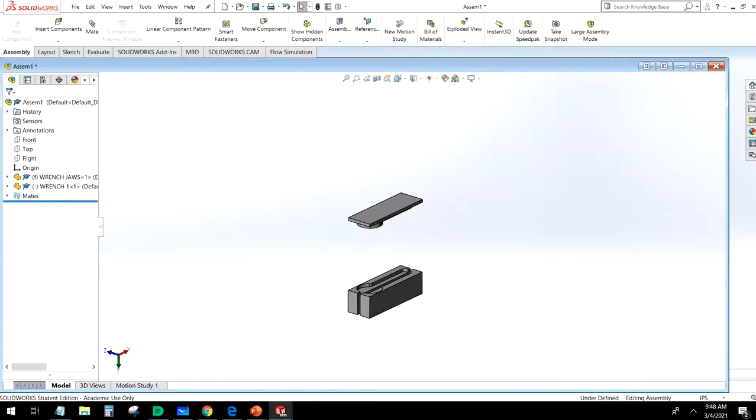So in our last few videos, we went ahead and we generated a custom tool table to match the tool crib that we have in person. We generated the tool path for our wrench, our custom CNC wrench. Now what we're going to do today is we're actually going to generate the model for our custom SoftJaws. Now, this is an easier process than I think a lot of people realize.

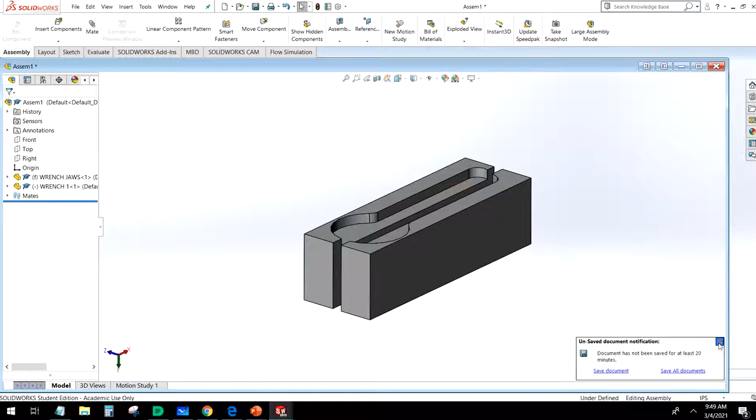And the reason why we have custom SoftJaws is because if we look at our wrench, we've got this flange of material that we use to hold this part into the vise. Well, we want to remove that. We need to take that material off. But if we try to clamp this part in just a regular mill vise, it's not going to hold it securely. We're not going to be able to clamp this very well.

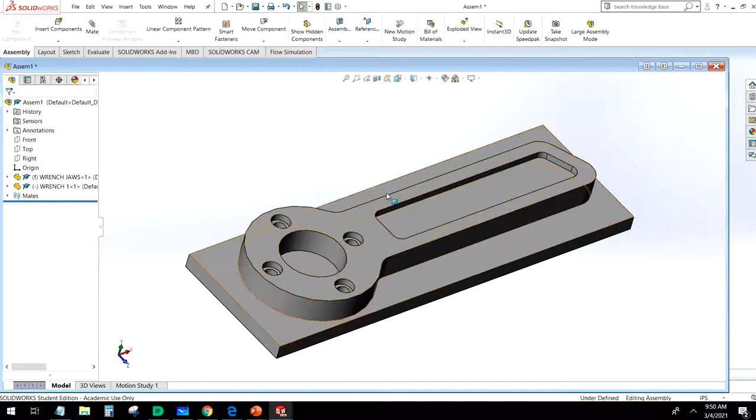So what we need to do is to create sort of an adapter, an interface between our part here and the mill vise. And SoftJaws is how we do that. So the way SoftJaws work is we're going to mount each one of these jaw plates to our bench vise. And then our piece is just going to sit down right in here like that. And it's going to clamp and hold that together securely.

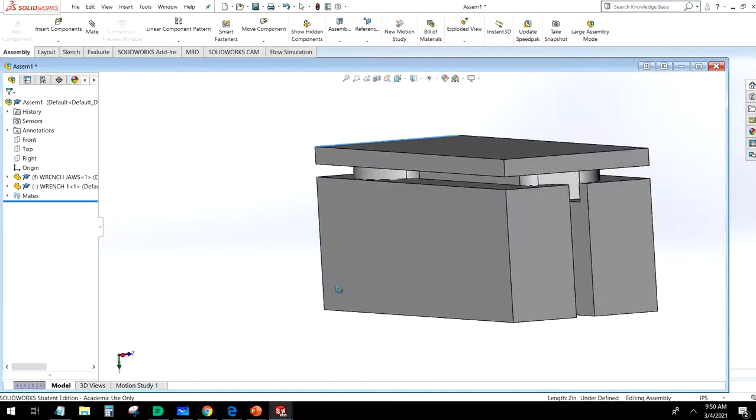And then we can come in here with the face mill and just sort of buzz this back plate off. If we wanted to, we could also do more milling on the backside if we had pockets or anything like that. But in our case, we're just going to buzz this off.

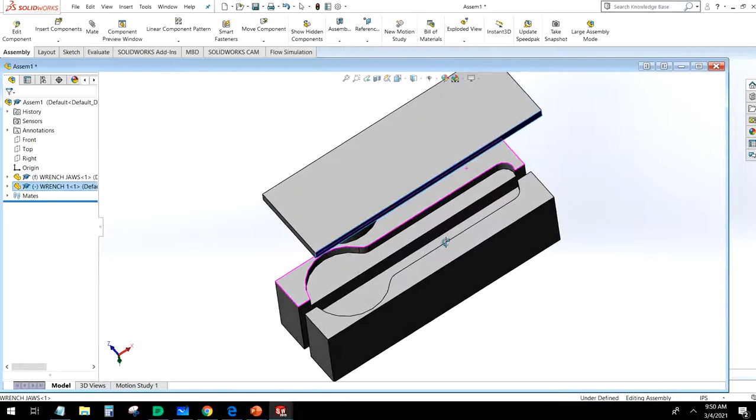Now, how do we go ahead and create these? Well, we're going to start this by opening up our wrench, this piece here from the last video. Now we're going to go ahead and save this as wrench SoftJaws, because we don't want to overwrite that file that we just made. So we're going to save this as, let's see, file, wrench SoftJaws.

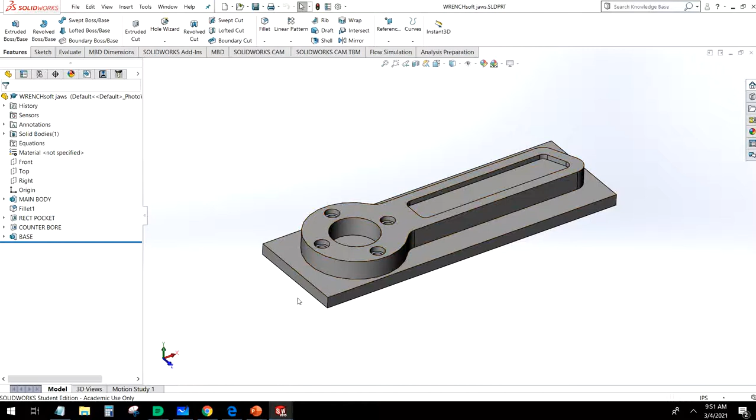Now what we need to do is we need to create a duplicate of our SoftJaws over this model. So we're going to start by selecting this surface here, and we're going to create a sketch on it. Now the stock size that we're using for our SoftJaws is going to be 3/4 of an inch thick.

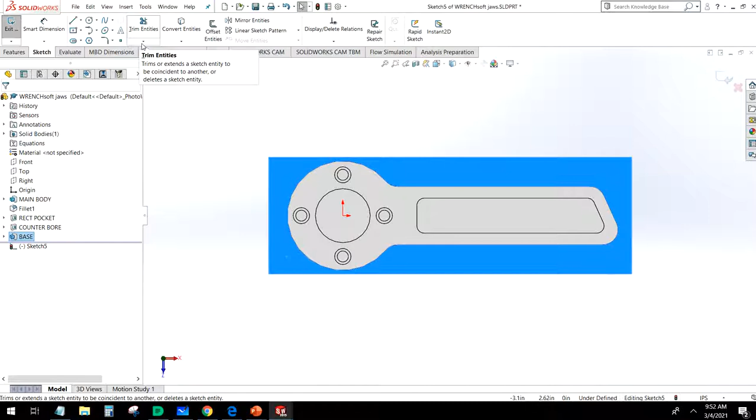So if we go ahead and we draw a corner rectangle, don't do this right now, I'm going to save you guys a step here. That's going to be one jaw. This is going to be the other. This will be 0.75, 0.75. All right, so we've got our two jaws, and we're going to be left with a 1/2 inch gap in the middle.

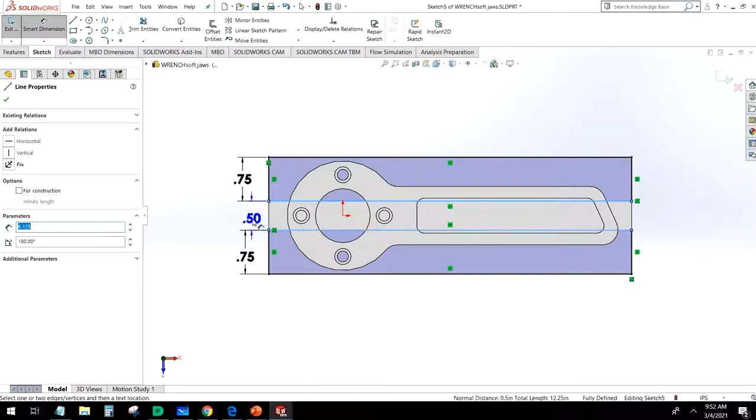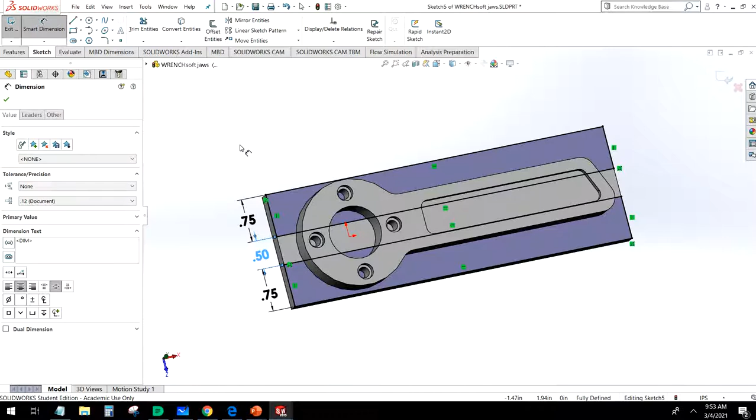Well, when we generate the toolpath for this, Solidworks CAM doesn't actually care that we're machining two separate jaws. So we're going to be able to machine this as one solid homogeneous block. And then when we set up our stock in the mill, we'll set up our two SoftJaws with a gap of a 1/2 inch in between. So we don't actually have to model that gap into our part.

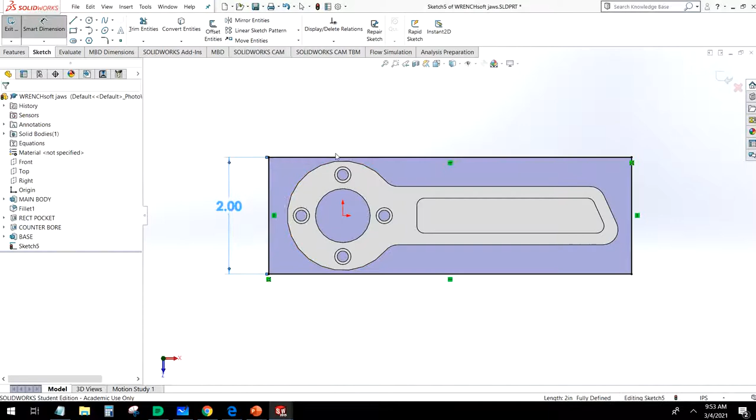So let's go ahead and get rid of both of these. And we're going to start by just taking our corner rectangle and drawing that straight up. So we're going to cover this whole thing. And we're going to smart dimension this. We shouldn't have to, but our dimensions should be 2 inches by 6 1/8.

Now we're going to go ahead and extrude this to a height that mimics our actual SoftJaws. And when we make our actual SoftJaws, they are going to be 1.75 inches tall. So we're going to go ahead, features, extrude boss base.

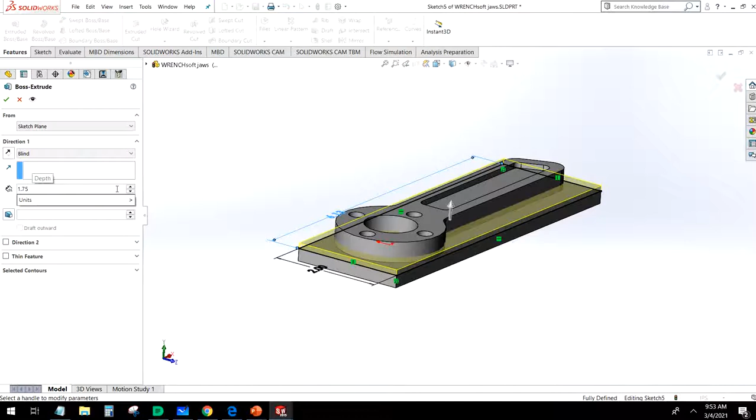1.75. Now, this is important. If we select merge results, it's just going to meld this into one big block, and we're not going to be able to do the next steps in this process. So make sure merge results is turned off. We need two separate independent bodies here. And then we can select OK. And you can see here we have our wrench and we have our SoftJaws.

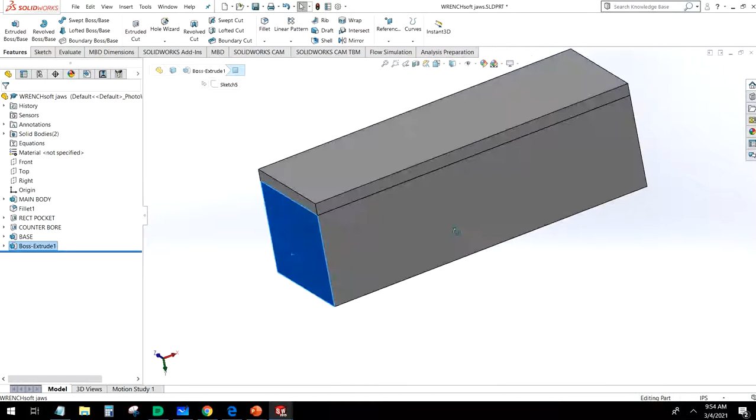Now, how do we separate the two? Well, we're going to do what we call a Pro Engineer move. We're going to go to Insert, Features, and Combine. Now, what we're able to do with this is we can add these two solids together. We could subtract one solid from another, or we can take the in-between where it overlaps. We're going to select Subtract.

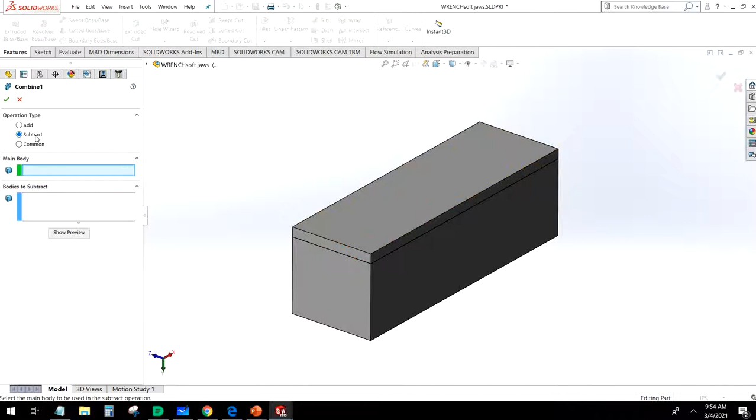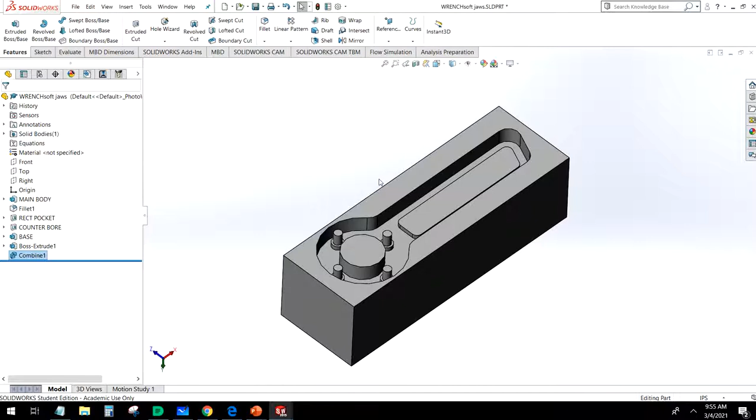Our main body, the body that we want to keep, is going to be our SoftJaws that we just modeled. The bodies that we're going to subtract are going to be the wrench. And we're going to select OK. And look at that. We end up with a perfect cavity of our wrench in our SoftJaws. Now we've got all these interior protrusions. We don't want any of that. So we're going to go ahead and cut those out.

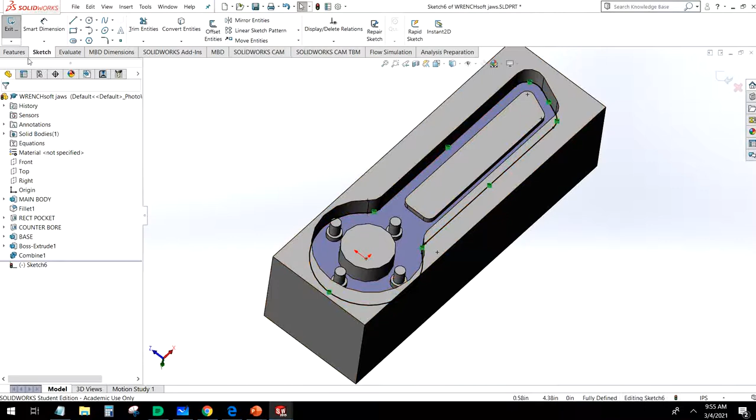We're going to go ahead and select this surface right here and create a sketch. We're going to select Convert Entities. That translates that surface into a sketch. And then we can go to Features, Extrude Cut. And we're going to cut this going upwards. And we'll do Through All.

And what that's going to do is that's going to remove all these protrusions in here. We don't need these in our SoftJaw. Right like that. Now we have a nice pocket for our material to fit in, or for our wrench to fit in.

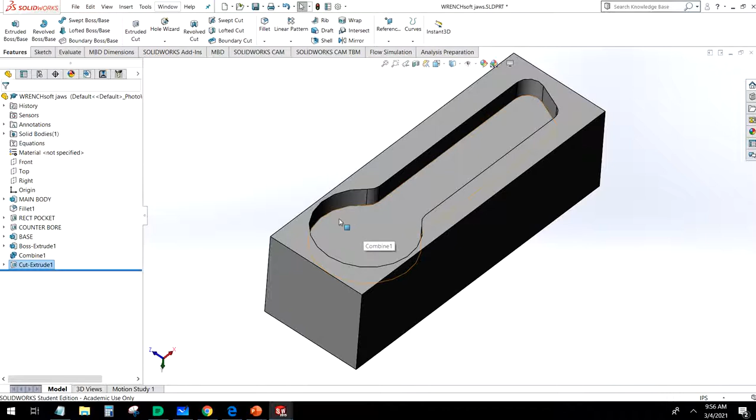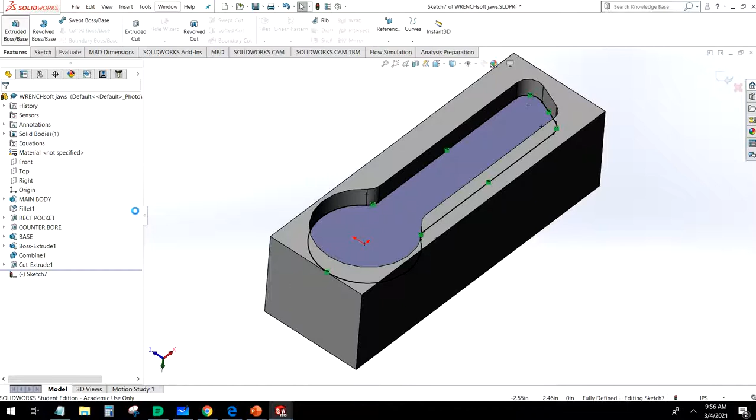Now what we're going to do is, the flange on our wrench is going to sit flush on here. We want to give it a little bit of a gap. So we're going to select right here this surface and create another sketch. We're going to convert entities, and we're going to go ahead and extrude this surface up 1/8 of an inch, 0.125.

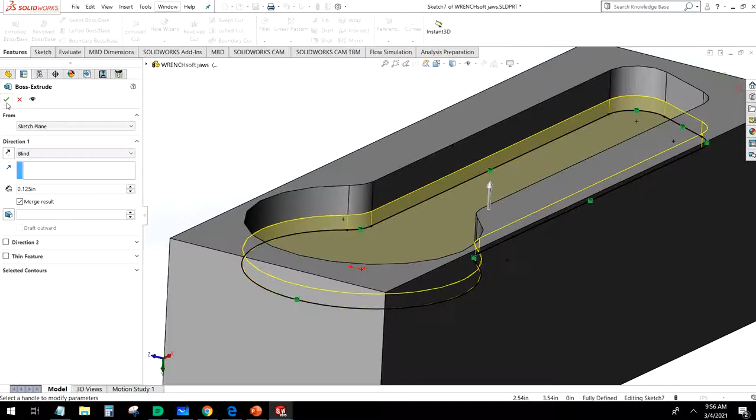This way we'll end up with a gap between the top of our SoftJaws and that flange that we're trying to remove. That's going to make our job a little bit easier. Right like that. And this looks pretty good. Now this is going to sit in our vise like this. This will be the fixed jaw. This will be the sliding jaw over here.

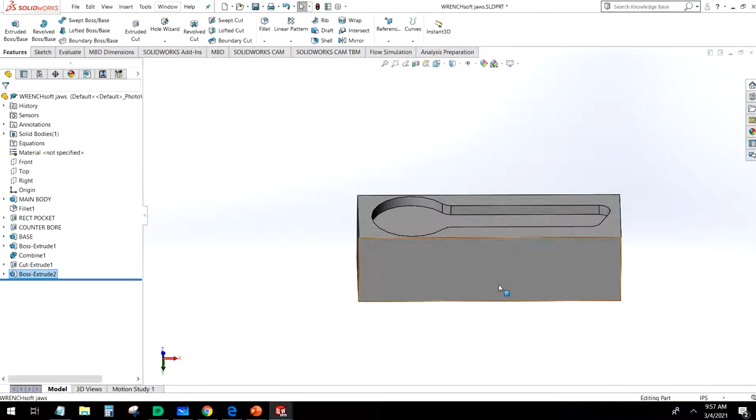So what we're going to do is we're going to go ahead and generate the toolpath for this. And this is a pretty simple toolpath to generate. We're going to go ahead and save this. And it's freaking out right now because I've already generated all the toolpaths for my wrench. And we don't have our wrench anymore, so we can't find them. So we're just going to ignore all these.

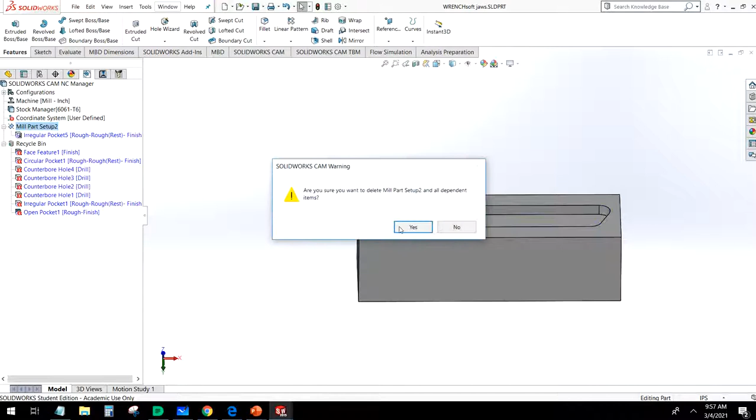And we're going to delete mill setup 1. We're going to delete mill setup 2. And we'll empty our recycling bin. Yep. So we're going to start this all from scratch now in SolidWorks CAM. So SolidWorks CAM, we're going to define the machine. We're using our mill in inches, and we want to set our tool crib to our manufacturing 3000 tool index.

Our coordinate system has changed. We can define by part bounding box vertex. We're going to select this front hand corner right here. Our X is going to go along this top edge. And our Y is going to go along this edge right here. And then our Z should be sticking straight up.

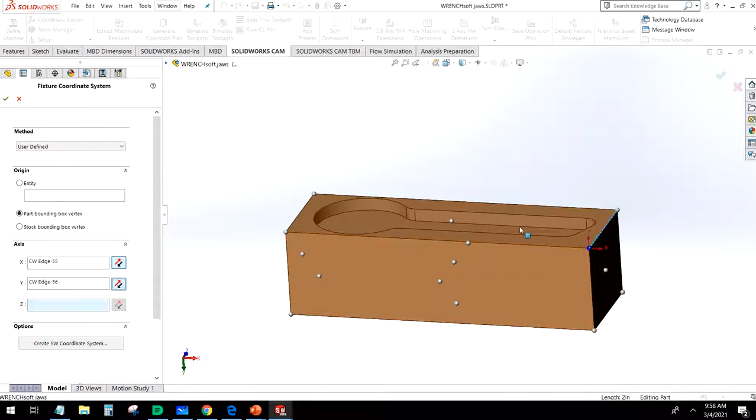That looks good. We're going to go to our stock manager. And we're not going to add any material to this. So we're going to set our Z's to 0. We're just going to use the base stock size that we have because we're not going to be facing this down or cutting this at all except for this pocket in our SoftJaws.

Setup, mill setup. We're going to tell our cutter which direction to go in. We're going to select this top surface here. Select OK.

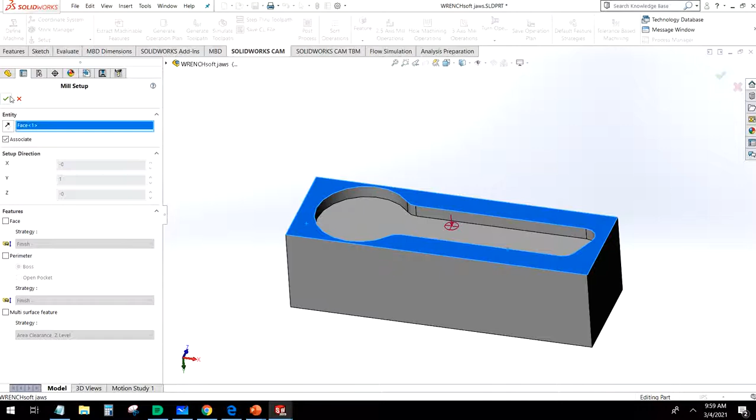We're going to extract machinable features. That's going to leave us with this interior pocket. Generate operations plan. It's going to break it down into a couple of rough mills and a couple of contour mills. And we're going to generate the toolpath.

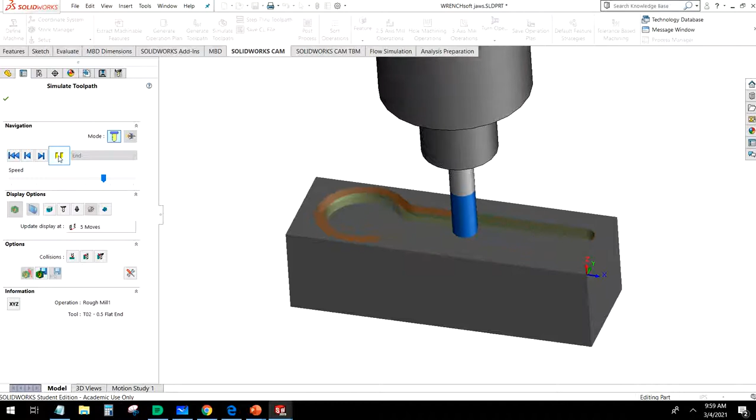Now let's just go ahead and run this and make sure everything looks good before we start fiddling with this. It's going to rough that out. That looks perfect. It's going to come in and clean up those corners where the 1/2 inch end mill couldn't reach. And then it's just going to buzz this clean. Very nice. So let's go ahead and edit these parameters.

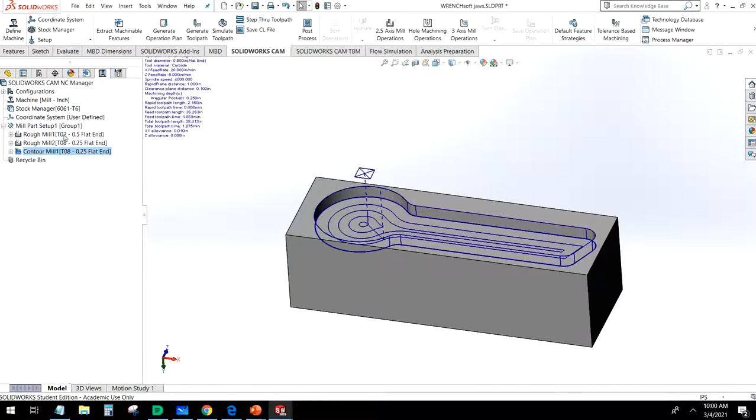And the 1/2 inch end mill and the 1/4 inch, those tools are fine. And we're going to leave all these operations in here. Let's go ahead and edit this rough mill, the 1/2 inch rough mill. Our tool is fine as the 1/2 inch. Our feeds and speeds we're going to set to our standard values of 2400. Feed rate of 10 and a Z feed rate of 2.5 and lead in of 5 is fine.

All our standard values. For roughing, we're going to treat this just like we have every other roughing pass with the 1/2 inch end mill. We're going to leave some allowance because we're going to clean this up. We're going to set our cut amounts to 50 thousandths. And the rapid plane is going to be 0.1 for the top of stock. And again, make sure cutter compensation is turned off. And we can select OK.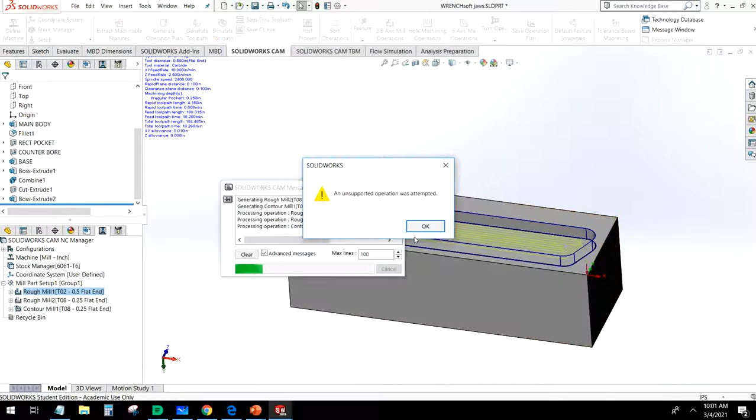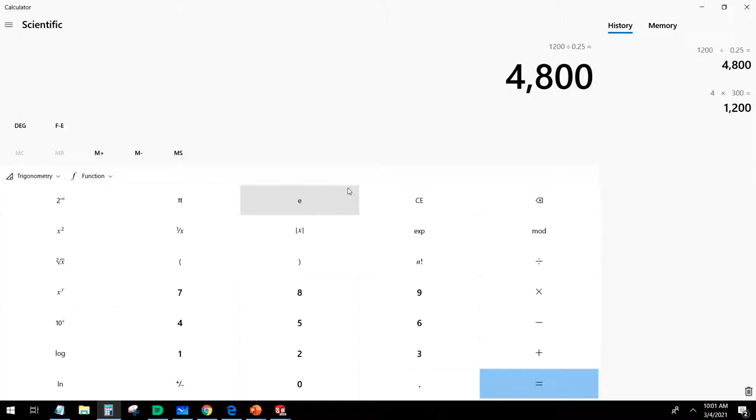Griping at me. We'll ignore that for now. For our rough mill 2, we're going to edit that. We're going to give this the same treatment. Our feeds and speeds for our rough mill, it's going to be 4 times 300, our surface speed for high-speed steel and aluminum, divided by 0.25. So 4,800, again, our machines can't reach that. We're going to use 2,800.

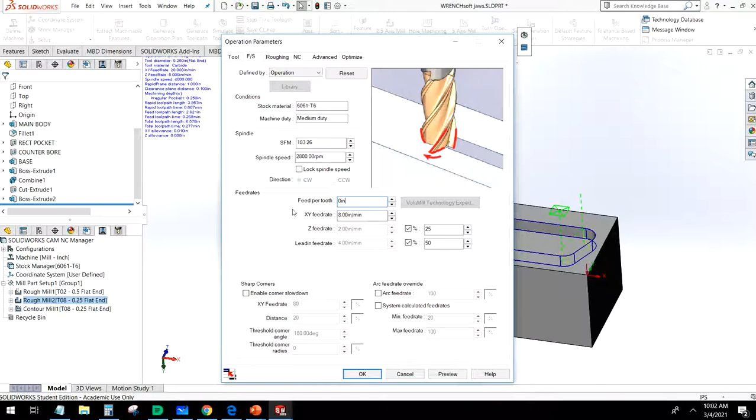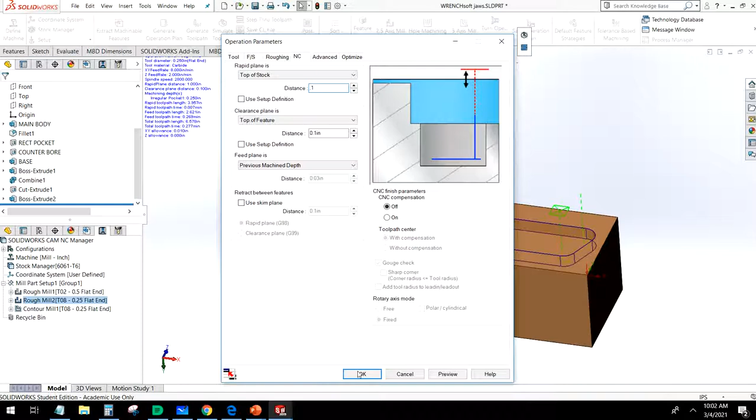And then our feed rate. This would be about 10 or 11 or so. We're going to slow this down to 8, just because we're dealing with that smaller cutter, we just want to buy ourselves some leeway. Roughing, we're going to leave that allowance as well because we're going to go ahead and do a contour pass. And we're going to set our max cut amounts to 50 thousandths. NC plane is going to be 0.1 and OK. It's griping at me. It should cut this just fine.

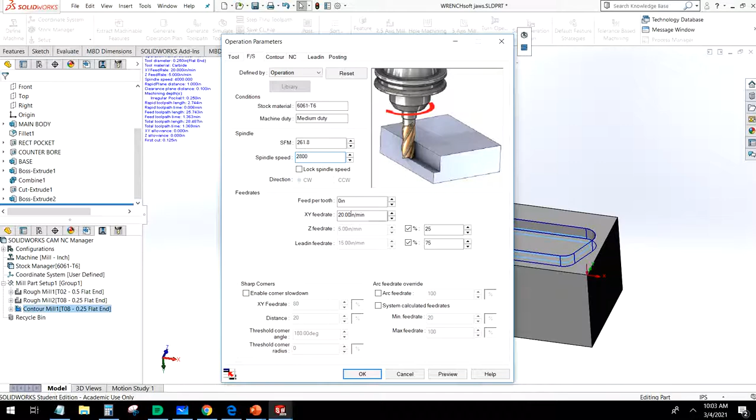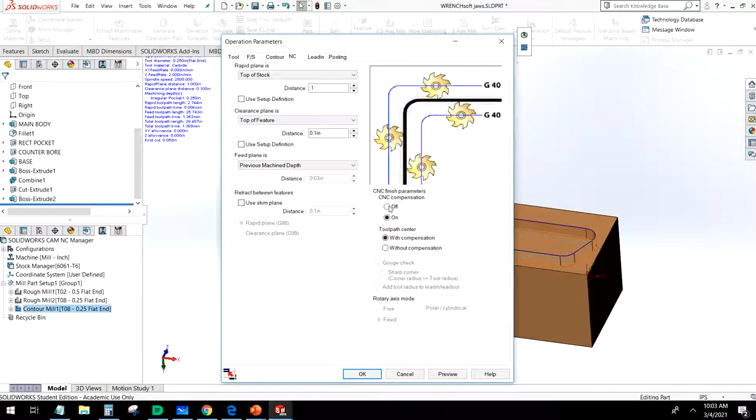And then finally our contour. We're going to go ahead, edit that, and give that the same treatment. Feed rate of 8. 50 thousandths depth of cut, and 0.1 for our clearance plane. Make sure cutter compensation is turned off on all of these. Quiet you. And then let's go ahead and see how this looks.

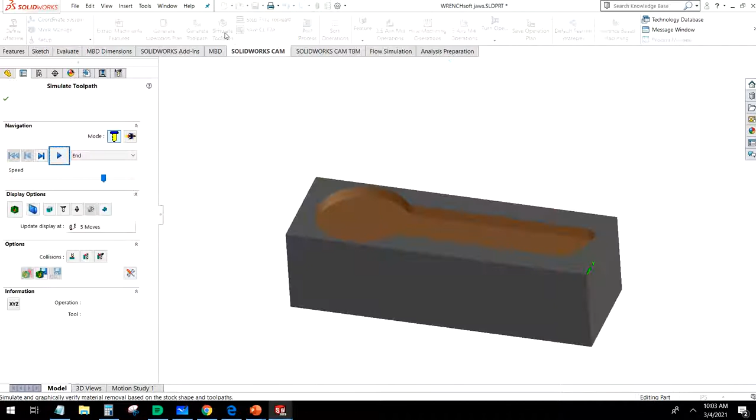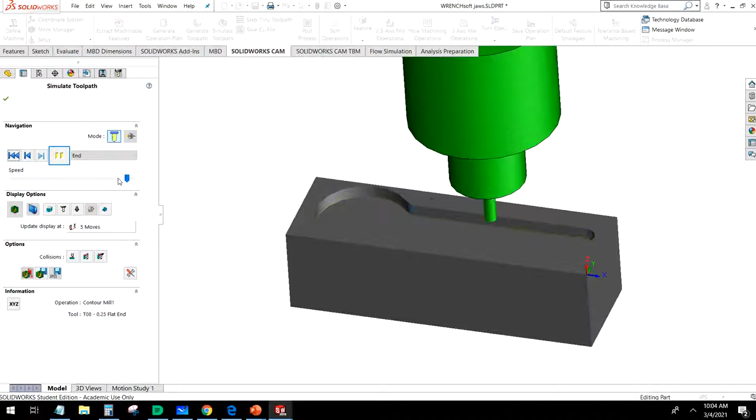Buzzing that out with the 1/2 inch to remove the bulk of the material. Just going to make quite a few passes on here. It should make about 10 or so. Clean up those corners. And then buzz that clean. Very nice. And then if we look at our total time, we're looking at 18 plus about 10. So about 30 minutes to go ahead and cut these soft jaws. And that's not too bad at all.

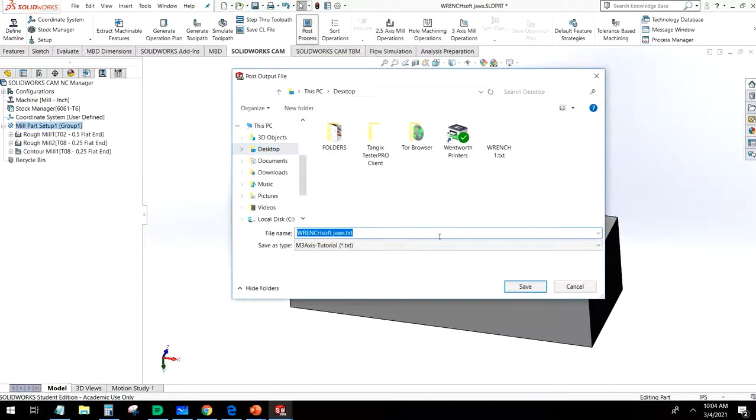So what we'd do from here, we'd go ahead and post-process this in our usual fashion. We're going to go ahead and export these as SoftJaws. And then we're going to go ahead and run that. And then we should be able to just take this, load in our aluminum SoftJaws into the mill, space them apart by a 1/2 inch, 0 and run our program. And then we should end up with our perfectly cut SoftJaws.

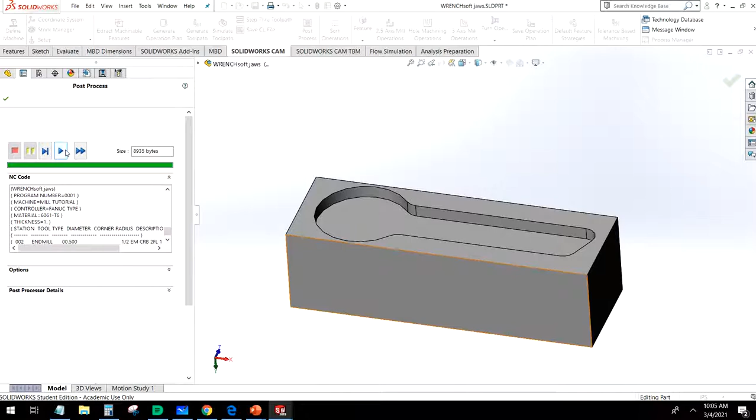Now again, we don't have to model these as 2 separate jaws because when it machines, it's going to cut both jaws at the same time. We can treat this like a solid object. And then we're just going to include a gap in here so that we have some room to squeeze this part together.